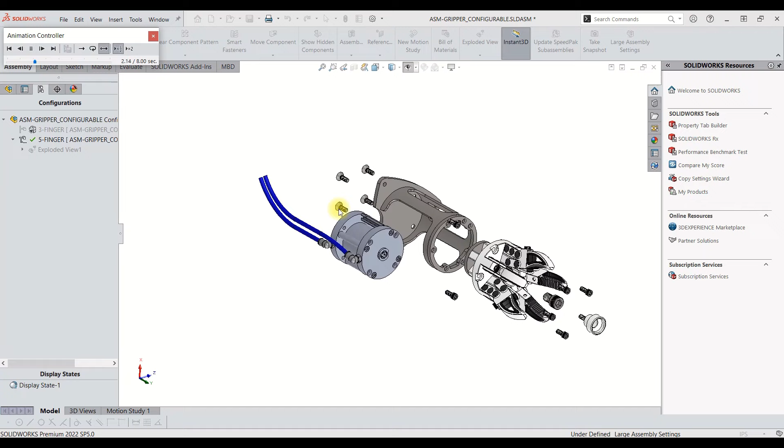This is where the tool really starts to become powerful as a way to manage indented BOMs right in Excel. If you haven't already, please watch Tutorial 1A for instructions to manually create a BOM, and Tutorial 1B for a guide to import a BOM from SOLIDWORKS or any other CAD system. We'll be using skills from both of those in this tutorial.

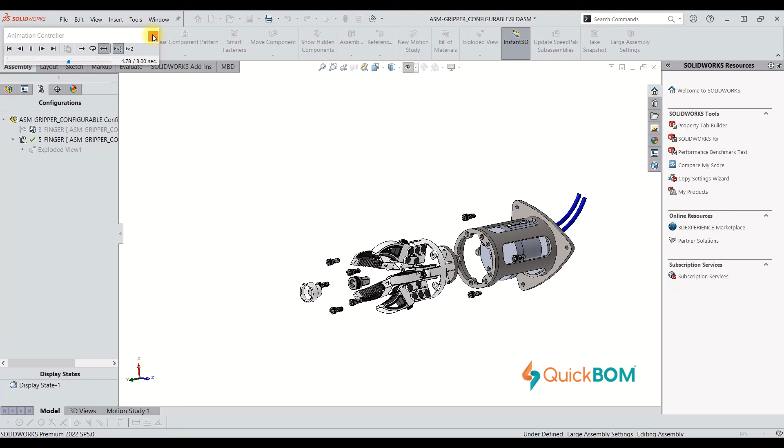We'll be reviewing this 5-jaw pneumatic gripper as an example. You can download this assembly if you'd like to follow along yourself. There are a few interesting things to note about this. Number 1, there's actually two configurations in this assembly, a 5-jaw version and a 3-jaw version. We'll treat each one as its own BOM, but they each share a lot of common components.

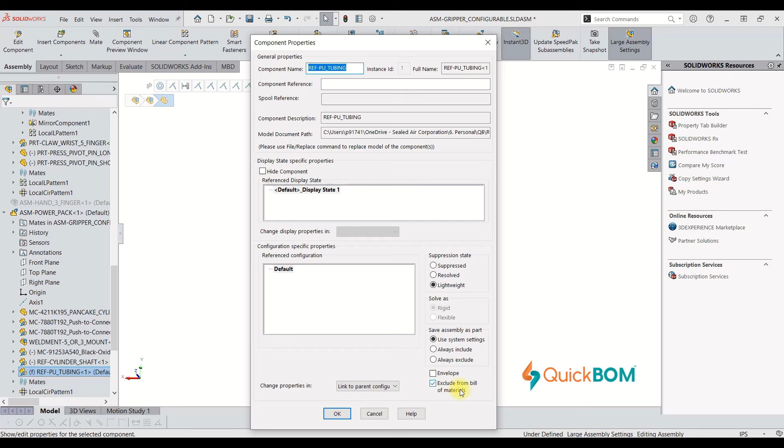2. There are some modeled parts that are excluded from BOM. If you click on this blue polyurethane tubing, you'll notice that it's got a ref in front of its name. Right-click and go to Component Properties and notice that Exclude from Bill of Materials is checked. Parts like this polyurethane tubing, other pneumatic components, and all electronics are not modeled and therefore not included in the BOM that SOLIDWORKS creates. Instead, we'll build those as manual BOMs, and QuickBOM will merge them into the CAD-controlled BOM.

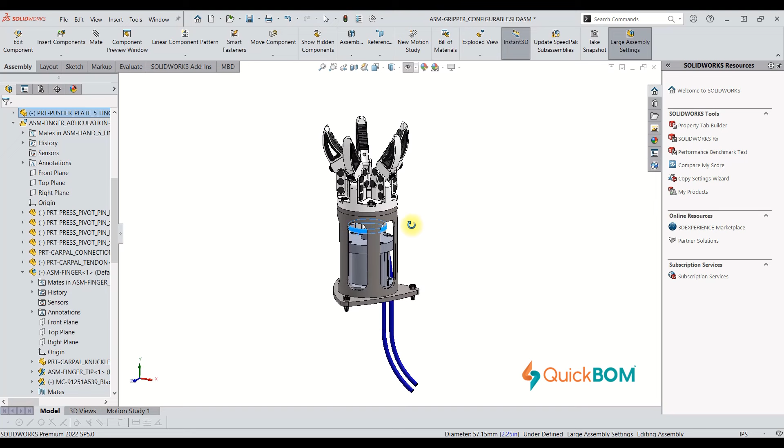Take a look at this Kits folder in the design tree. By default, we're going to include a sensor kit, a valve kit, and a spare parts kit with each gripper. If you open up any of these part files, notice that there's no geometry. That's intentional. We'll talk about why a little bit later.

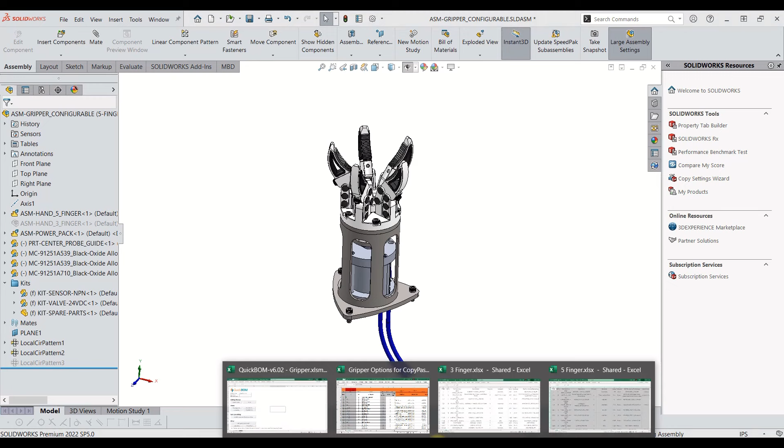So let's go ahead and get our BOMs into QuickBOM. Like I mentioned, we'll treat each configuration as its own BOM. On the Instructions tab, click Create New BOM. Select CAD BOM and name it Gripper 5-Finger. Now do that again, but name the next tab Gripper 3-Finger for the other configuration of the gripper. Let's also create a manual BOM tab for all of the pneumatics and electronics that don't get modeled. We'll call it Gripper Options.

Let's tackle this manually created BOM first. Normally, I would have my engineers building a manual BOM in parallel with the SOLIDWORKS design process. Anytime they identify a part that doesn't need to be modeled, they would add it to the manual BOM. For the sake of this tutorial, I'm going to paste all of this information in. I have a file ready called Gripper Options for Copy-Paste, which you can download from the link in the comments.

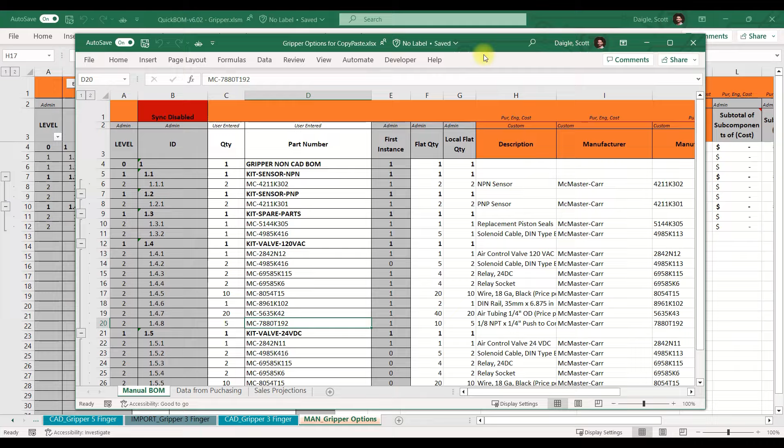Before we paste in data, we're going to disable sync. You'll want to do this anytime you do some serious surgery on any of the indented BOM tabs. Sync refers to the collection of macros that keep the library and all of the indented BOM tabs in sync. If you make too many changes at once, the sync function will try to account for all of them at the same time and it'll trip over its own feet. Once you make your changes, you can turn sync back on and the sheet will catch up on its own.

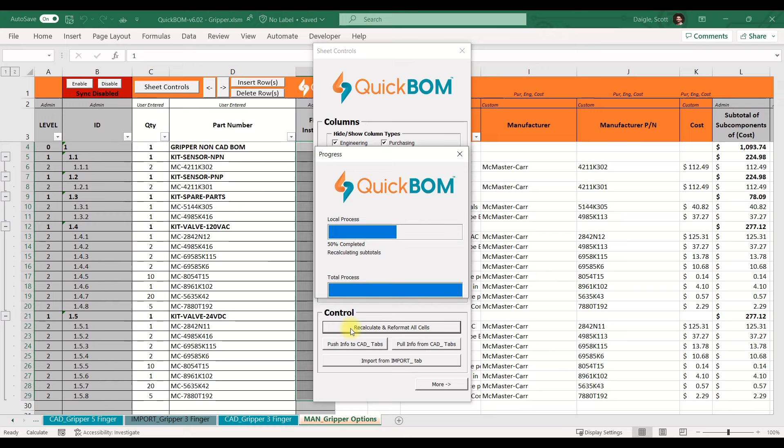So let's copy the information from the other file and paste it into man_gripper options. Then we'll click Enable Sync in the top left of the sheet. QuickBOM will churn as it works to load every part and its data into the Library tab. Once it's done, we'll notice that some of the formatting is a bit off. Click Sheet Controls and click Recalculate and Reformat All Cells. If the cost data isn't showing up with dollar signs, highlight those columns and reformat them too.

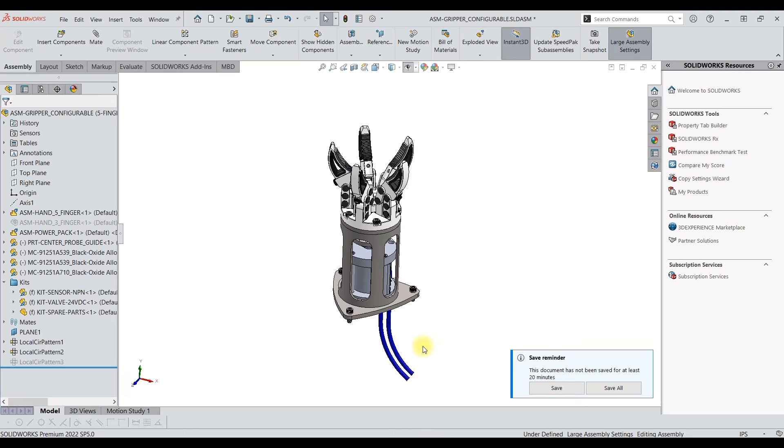There, that's looking better. Let's pause to look at what's in here. There are two sensor kits, NPN and PNP. These sensors clip onto the side of the cylinder to sense whether it's extended or retracted. Depending on a customer's setup, they might need NPN or PNP. There's also a spare parts kit, which contains replacement seals and a spare solenoid cable.

Lastly, there are two solenoid valve kits, one that runs on 120 volts AC and one that runs on 24 volts DC. A quick glance through the list makes me notice that each kit is very similar, but not identical. For example, they both have the same air tubing and push-to-connect fittings, but they have different relays and different solenoid valves because of the different voltage.

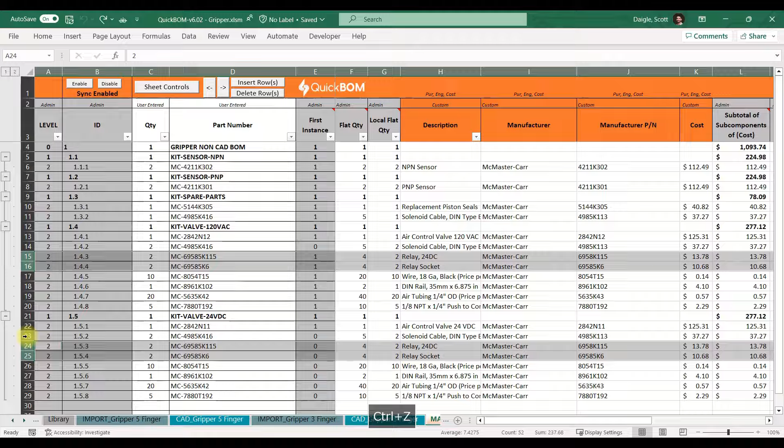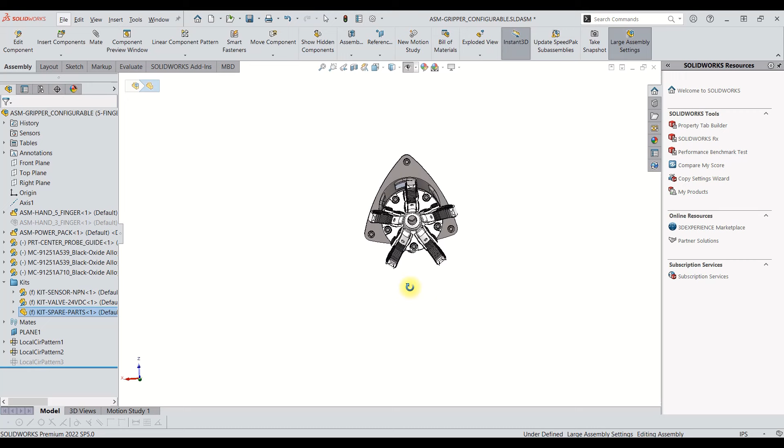If we look back at the CAD file in the kits folder, we'll notice that there's one NPN sensor kit, one 24 volt DC valve kit, and one spare parts kit. Having these in the CAD managed BOM will pull in information from the manually created BOM, and you'll see this later in the process. Now, let's work on creating a BOM for each CAD configuration.

Activate the 5-finger configuration. Select the 5-finger BOM and save it as an Excel file. Activate the 3-finger configuration and rebuild it to make certain that the BOM table is updated. Select the 3-finger BOM and save it as an Excel file too.

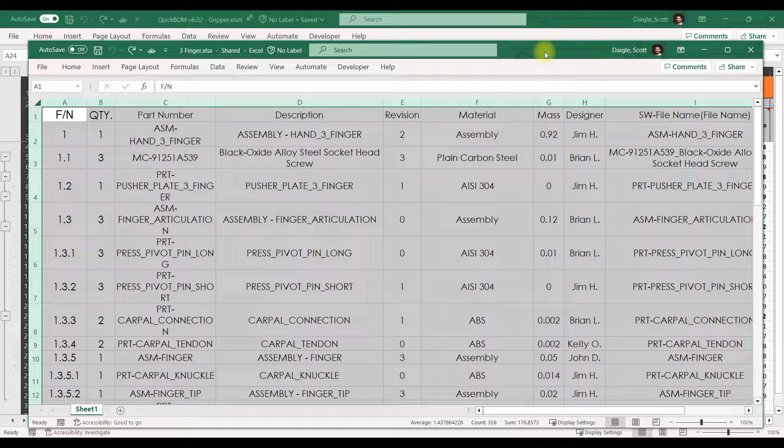Now, we'll copy and paste them into their import tabs.

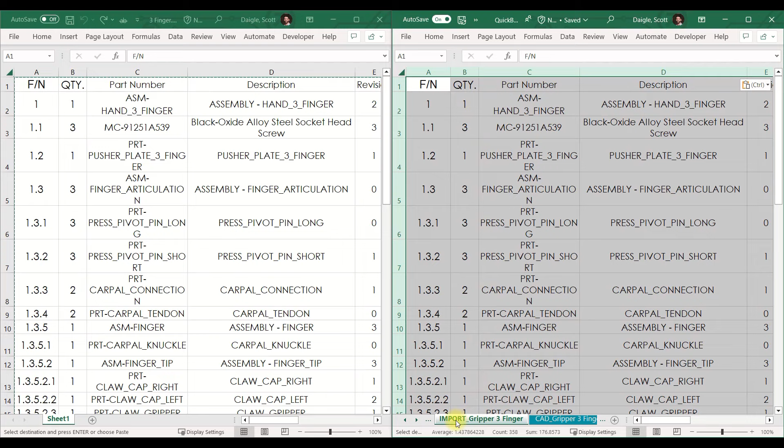Finally, we're ready to import. We could do this BOM by BOM by clicking Sheet Controls and Import. Instead, let's do both BOMs at once. Go to the Instructions tab and click All BOMs: Import from CAD and sync all BOMs. Follow the prompts and watch QuickBOM do its work. Each part will get an entry in the Library tab, and each CAD tab will become a structured BOM.

In the QuickBOM file, there's a lot of tabs now, so let's hide some of the ones that we don't need anymore. On the Instructions tab, let's click Hide Import Tabs because we won't be needing them for a while.

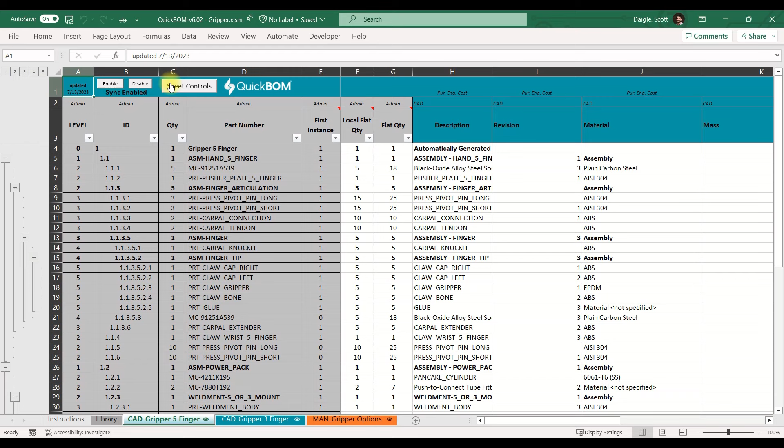Now, let's take a look at Gripper 5-finger. We'll take a look at the structure for a bit. I'm going to click on Sheet Controls and minimize all groups.

Notice that this matches SOLIDWORKS exactly. I can expand ASM Hand 5-finger in QuickBOM and in SOLIDWORKS and I'll see the exact same things. And I can drill all the way down until I find whatever I need.

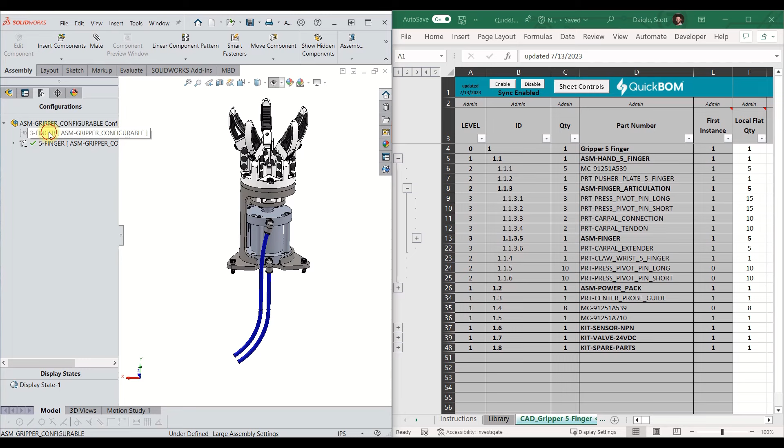If I flip SOLIDWORKS over to the 3-finger configuration and go to the 3-finger tab of the Excel file, I find the same thing. Everything is identical all the way down, except for these kits. The only difference between SOLIDWORKS and what's in QuickBOM is these kits down here.

If I expand one of the kits, I notice this yellow patch of cells. Everything in yellow was pulled from your manual BOM. This is a key feature of QuickBOM.

You can create manual BOMs full of parts that don't get modeled in CAD, such as wires, hoses, and electrical components. Just include the top level part number as an empty part file in your CAD model, and all the manually created parts will get pulled in.

You can also do the opposite and create a CAD-driven BOM that gets pulled into the manual BOMs. Importantly, the same parts can be in the CAD BOM and the manual BOM.

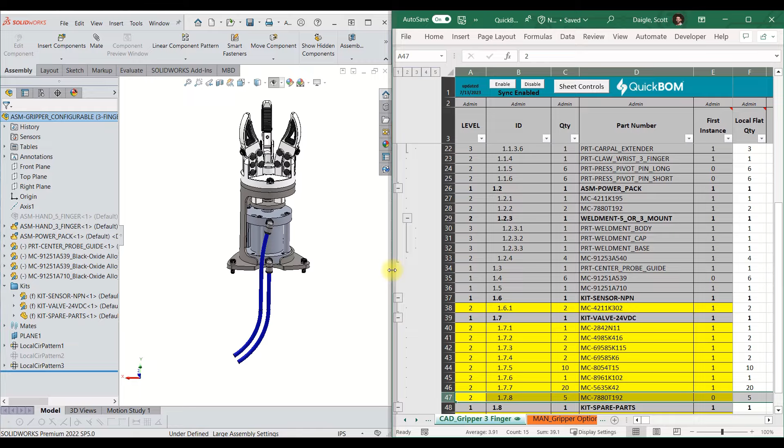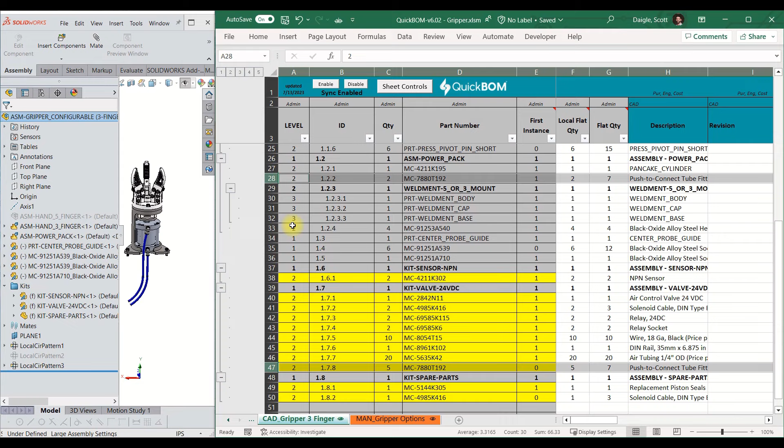Just look at this part, MC-7880T192 in row 47. This is a push-to-connect fitting for the pneumatic airlines. This is contained both in the manual BOM and in the CAD model. The same part and the same data records are common between them. The more you use this system, the more you will find opportunities for this feature to get you out of an edge case while designing.

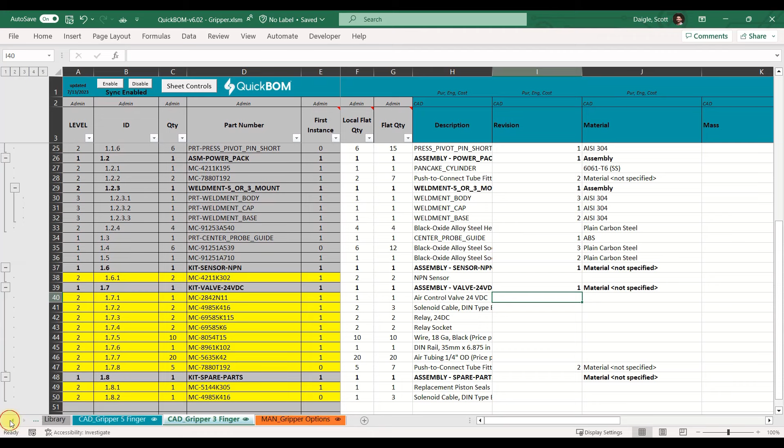Now, let's imagine that your cost information comes from a different system, like your ERP system. In my day job as an engineering manager, that's the way my company operates, so I've come up with some tricks to merge that external information into QuickBOM.

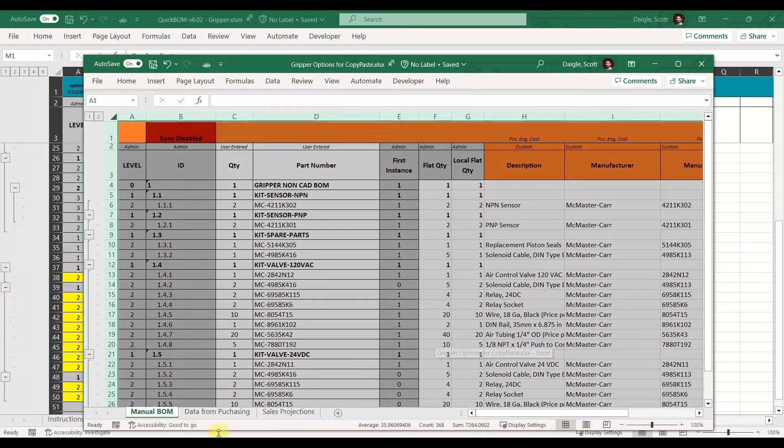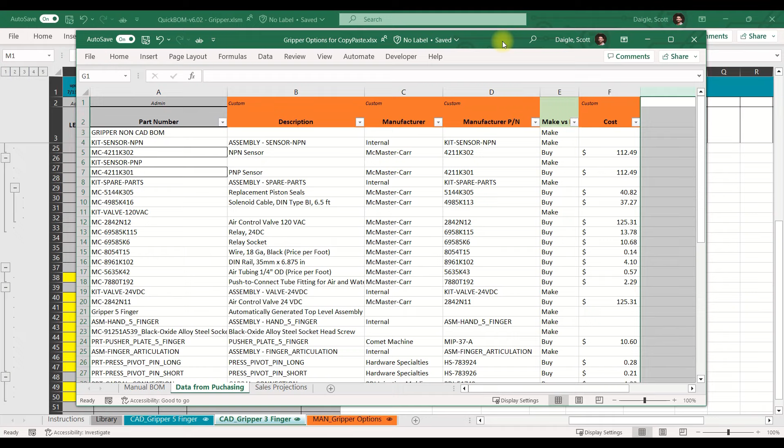Let's say that you ask your purchasing partner to go out and get quotes for all the purchase parts, and he comes back with this Excel file. It's great and well organized, but it's on its own little island. So let's try to merge it into QuickBOM.

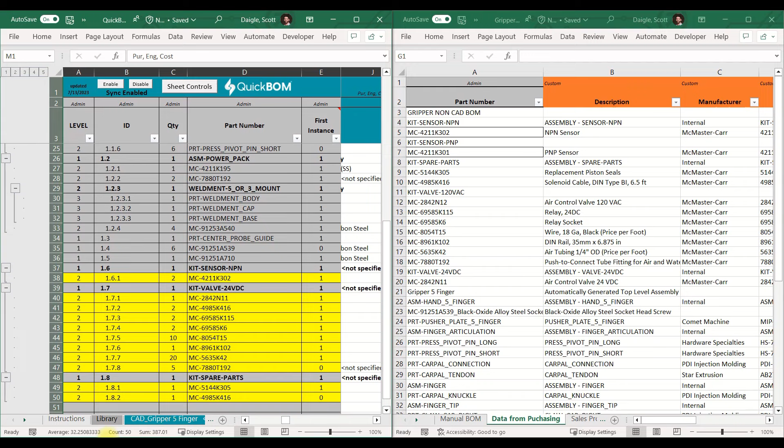You're going to do all of this on the Library tab. Let's get both documents where we can see them, and we'll be using basic Excel formulas to pull in this information. In this case, I'm going to create a few new columns where I want this to go. And when you do this, it's recommended to indicate that these are custom attributes by typing custom in the cell above.

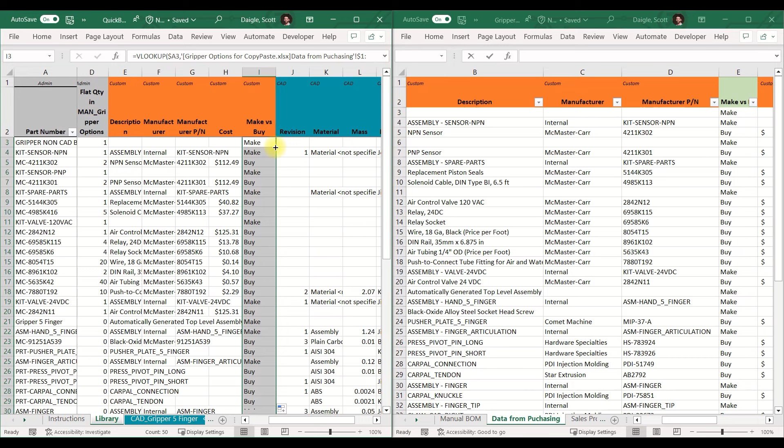I'll be using a VLOOKUP formula like this, and then I'll copy and paste it down the list. And then I'm going to repeat that for the attributes cost, manufacturer, and manufacturer part number.

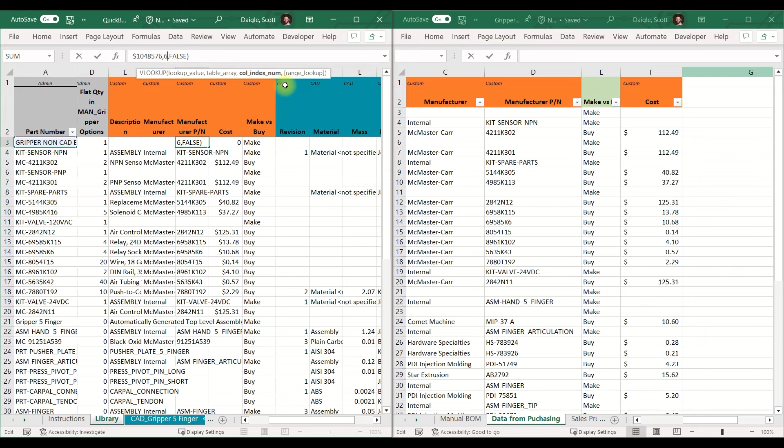Once done, I'm going to highlight everything, copy and paste as values to kill off the formulas that pull information between files. I personally have followed this process to pull in stock quantities, lead times, minimum order quantities, vendor terms, and anything else that I might need to advise buying decisions and BOM management.

Let's flip back to the indented BOM tabs and notice that the cost for everything has been updated. The sheet automatically calculates a cost of $1,159 for the 5 finger version and $1,030 for the 3 finger version.

In my job as an engineering manager, I like to use this process to track cost as we go through the design process. That way, I can get a pretty good vision of where our total cost will be when all is said and done.

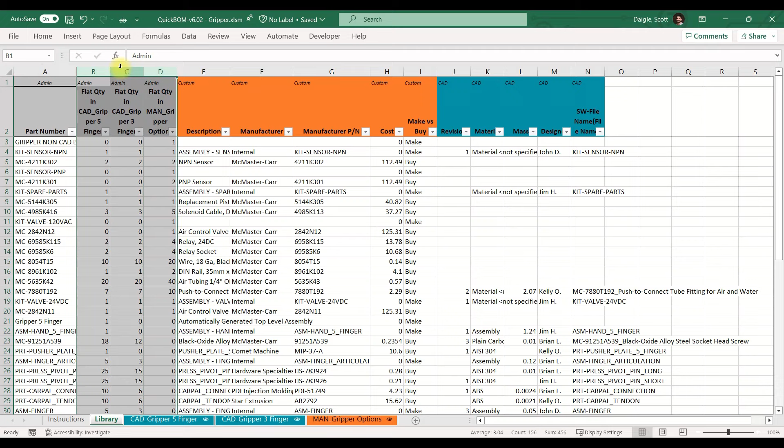I've also seen engineering teams store cost information in the custom properties or the data cards of their SOLIDWORKS parts. This is another effective way to manage cost, and QuickBOM can pull in that information and come up with subtotals just the same.

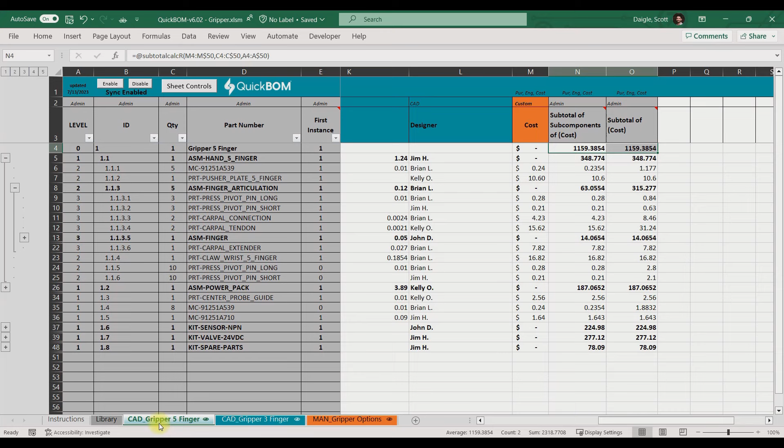Now imagine that your VP of Marketing brings you the sales projections. The company thinks it will sell 3,000 of these grippers next year, but that is broken up into 2,000 of the 3-jaw version, and the other 1,000 as the 5-jaw version. How many of each part should purchasing buy in preparation for next year?

Let's calculate it. We'll use flat quantity in CAD gripper 3-finger, and flat quantity in CAD gripper 5-finger. You can trust these numbers to be the quantity that you need to build one gripper.

Let's create a new column to store the calculation. We'll call it EAU, short for Estimated Annual Usage. Type custom into the cell above it. And we'll write a formula that is equals flat quantity 3-finger times 2,000 plus flat quantity 5-finger times 1,000.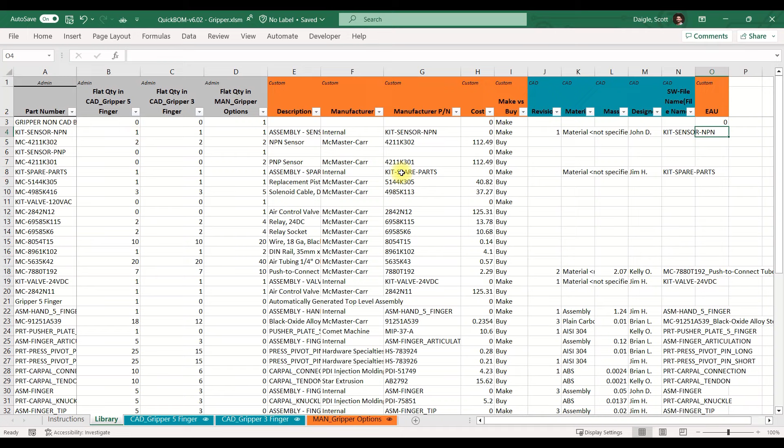And we'll drag down the formulas. This is how many parts we'll need this year, taking into account that we're going to build more of the 3-finger version than the 5-finger version.

If we had the current stock levels in this sheet, I would incorporate them into the formula and really get a granular view of how many we need.

Now, let's calculate the total value of those parts per year. We'll create another column called Total Value and calculate it as equals EAU times cost.

In my job as an engineering manager, I find myself referencing this very column a lot. I filter and sort for the highest value items, and that's where I have my engineers focus their cost reduction efforts. With all this information that we built into the Flat BOM library tab, it's good to refresh our minds that we can pull any of this information back into the indented BOM.

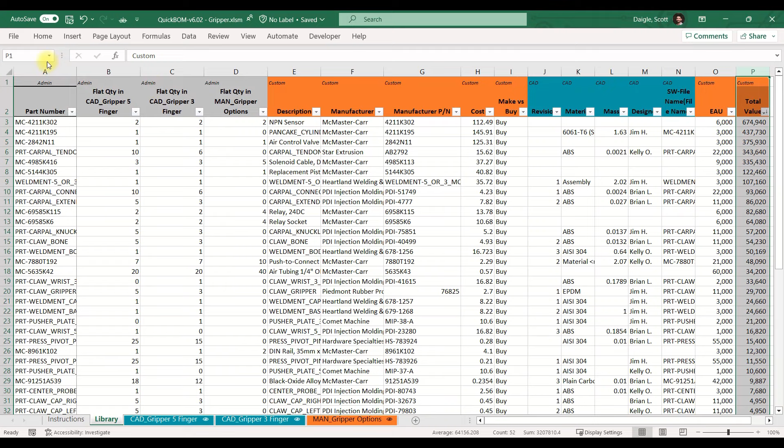Let's flip over to CAD Gripper 5 Finger, and we'll add in a total value column. Click Sheet Controls, Insert Column Header, Custom, and select Total Value.

A quick word about searching. If you want to find a part but you don't know its part number, you might use Ctrl F to search for it in the descriptions.

Let's do that right now for the search term wire. It finds nothing. Why is this? There are two possible reasons.

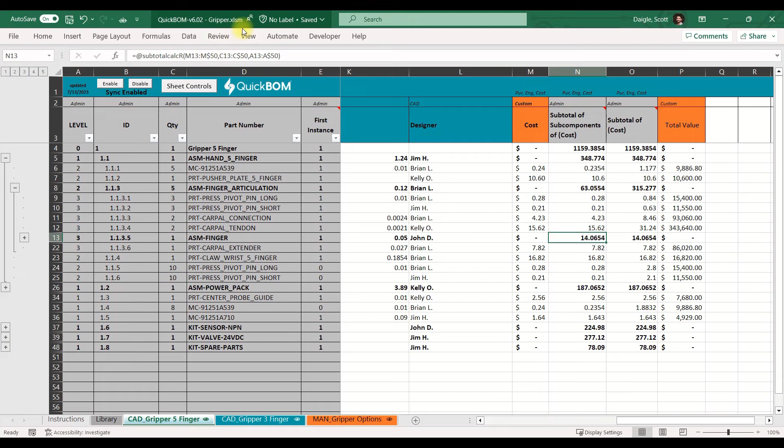Number one, Excel won't look through cells that are hidden. Before you search, you'll need to get into the habit of going to Sheet Controls and clicking Expand All Groups.

Number two, Excel by default searches through formulas, but we want it to search through values. You'll have to get into the habit of telling it to look in values with this drop-down box here.

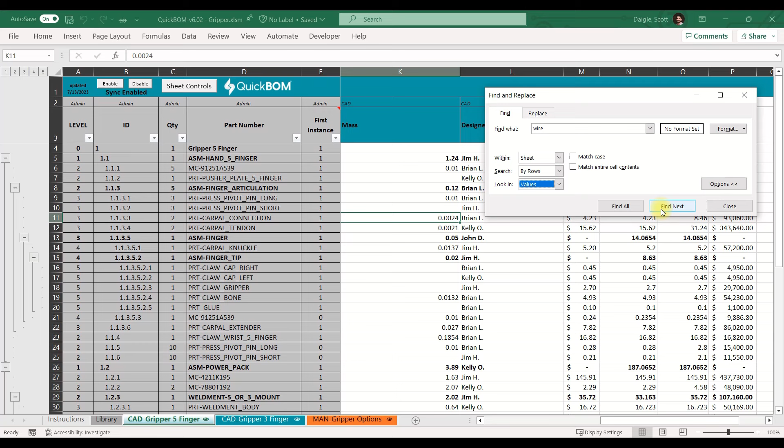Now, a quick search for wire reveals that we are speccing this specific 18 gauge black wire, and we're using approximately 10 feet per machine.

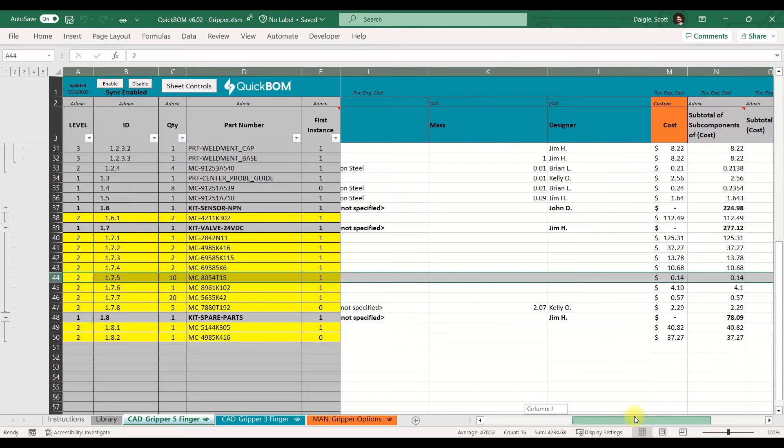That concludes everything in the advanced training. You now know how to handle CAD assemblies with configurations, how to create manually created BOMs, how to merge CAD-driven BOMs and manually created BOMs, how to import data from other systems like your ERP or price lists, how to calculate custom attributes like estimated annual usage, how to filter and sort data in your library tab.

That's your Flat BOM. How to create and remove custom attributes from parts. How to search for parts throughout the sheet.